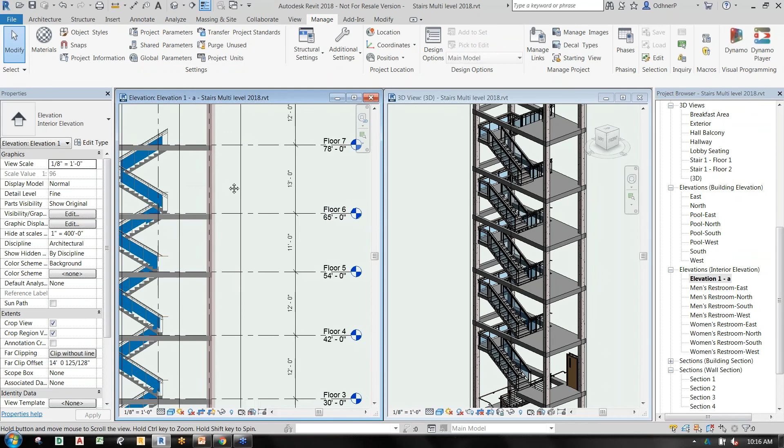Also, you can tab in and cycle through your tabs and change individual stairs within your set here. So even though you're in a multi-stair, you can actually unpin this and go up and edit the stairs individually. A very powerful tool because not everything is going to be designed like a parking garage. This will help you tremendously with connectivity of your datums and your stairs.

So I'm actually going to take some of this. The other thing you can do is add levels - they make it very easy now to add and take away levels from a multi-stair. I'm going to hover over the stairs, and up here in the ribbon you've got this connect and disconnect levels option. So what I can do is hit that, and it brings you into this subcategory menu with connect and disconnect.

So I'm actually going to disconnect the top here, and you see it's giving you the available datums that you can connect or disconnect appropriately. So you could do a crossing here, and basically I can do the check, and then you've got these stairs - just the 3 levels that you need there.

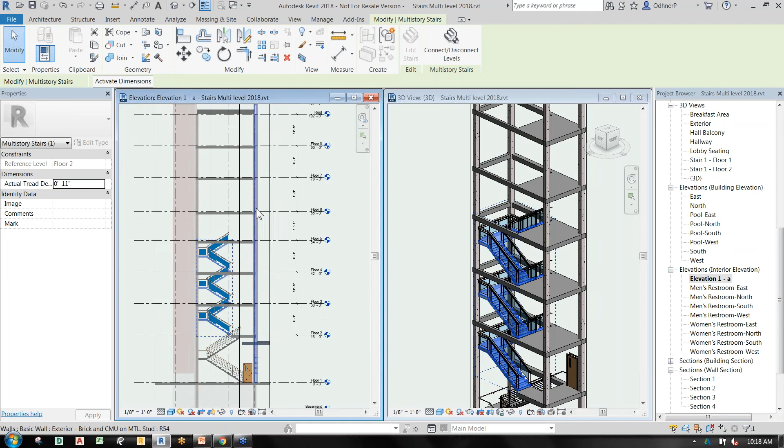The other thing - you can go back, and if I click that again, cycle through there, tab is going to be your friend on this one. I'm going to hit connect and disconnect again, and it's going to open up the possibilities of what I can connect here. I'm going to go through here and do this crossing all the way up, I'll just go up to 6 and 7 again. Check. And you've got that all in one set now. Really, really nice connection there.

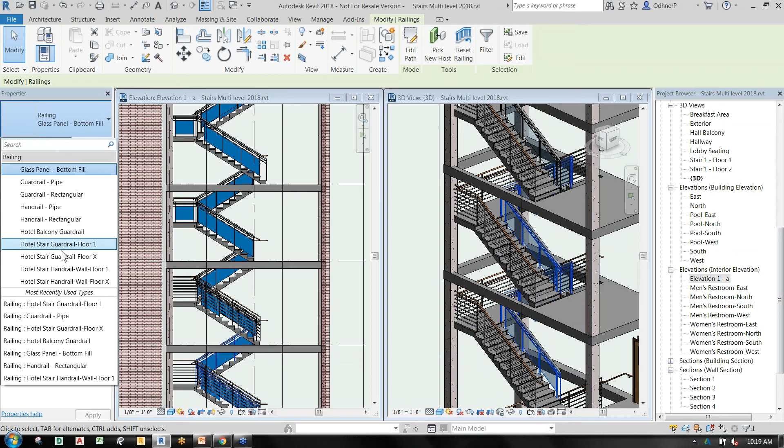The other thing is you can actually grab on railings, and I can do this in a 3D view. Before, I believe you were always able to do this, so I could actually change this in one setting. And if you wanted to go the other side there, you can change that too. So I've got a glass panel, and I'm just going over to the type selector and actually changing my railing type there.

So basically, the levels - if they're moving around, I can actually take this level and bump that up to 55. And these stairs are conforming to the levels. A really, really nice thing.

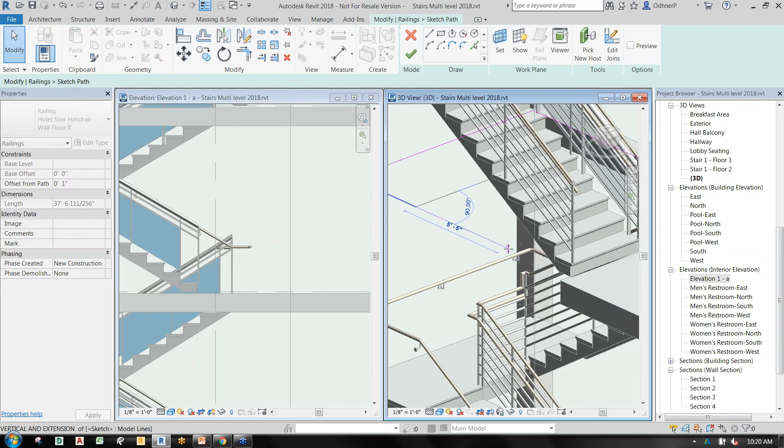Some of these railings right here, you might have to go in there - got a little message there. They've cleaned up the railings a little bit, but you might have to go in and do some touch up to the railings. They've made it now so when you edit path, you can actually see and change the railing for all the stairs there. So I can move that in on a sketch mode, and that section there is taken off, and when I actually hit check, some of that railing should have been taken off there.

So a little more flexibility in railings and stuff like that. We're going to go into railings a bit more now because they actually connect onto surfaces too. Let me bring this back up. Bottom line: you can move your levels around and still have connectivity. Your stairs are grouped by level and height, and level heights can change within a group. Really nice stuff there.

Enhanced railings: you can add railings to the entire multi-story stair tower, which we just did before. The other thing is now you can host railings automatically on contours or surfaces. Before, on version 17, they added a really useful tool where you could add it to retaining walls, not just stairs or treads and stringers. You can bring this onto just about anything now.

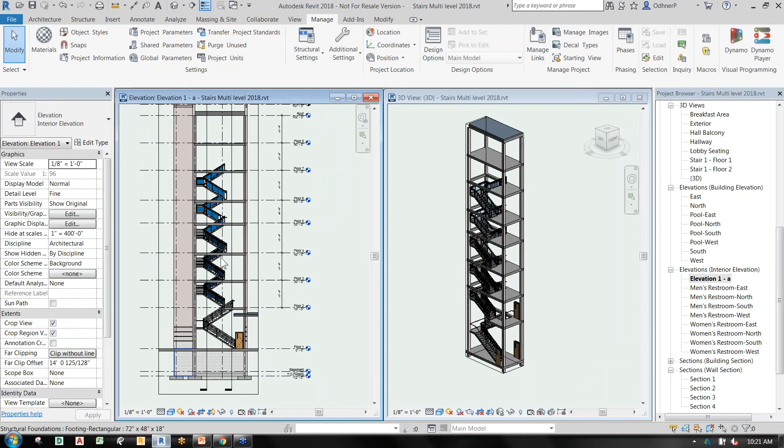So let's give that a shot. We're also going to put this on a topo surface, and I've got one already here. Let me go into 3D. Here we have a very simple contour surface made by Revit. You can see it's not complicated at all.

I suggest taking advantage of edit surfaces and adding topography to your model, because it really brings it out and gives it a lot of pizzazz when you see your building with the surrounding earth around it. I'd recommend, even if you don't keep it in during construction documentation, maybe have it in there during the design intent stage.

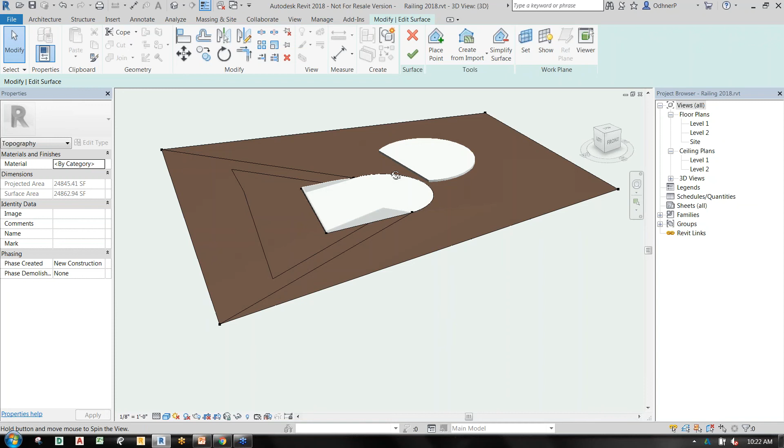So what I'm going to do here is add a stair. We have a platform here, and I'm going to add a stair from the first floor to the second floor. Let me close that up and go into level 1.

There you go. Basically we're going to add a simple stair here with a little landing, going from level 1 to level 2. And we're going to move this so we have a good connection there.

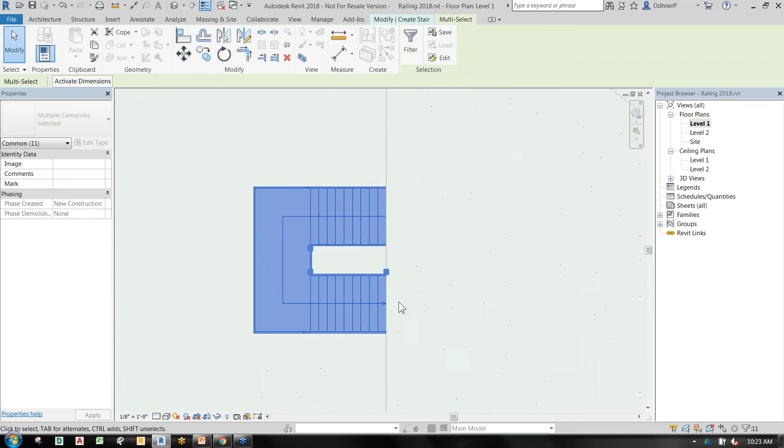Right in here, of course, you've got your railings, and we can add those to the treads or the stringer. So I'm going to go glass panel, add them to the stringer, and connect it. You might get some railing issues, but they've improved those railing connections in the past—around corners and things like that—so you can see you get a little better connectivity there.

The other thing I wanted to show you guys is putting railings on the outside of this retaining wall here. How you do that is you go up to Architecture, Railings, and this time we're going to sketch a path—you've also got Place on Stairs option.

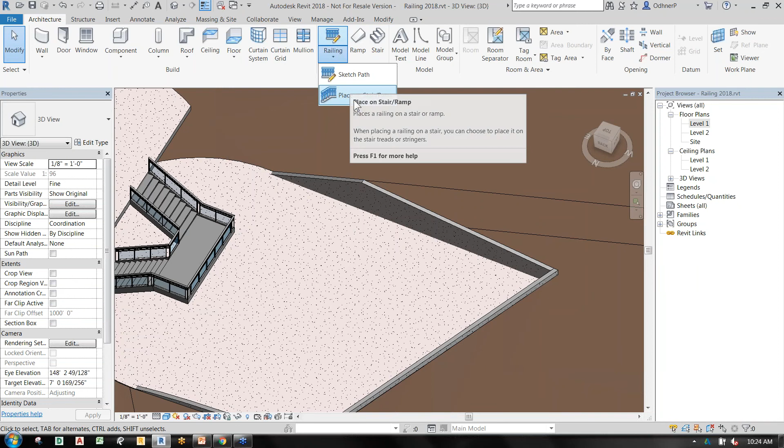So we're going to sketch that path. From here, I'm going to see if I can draw this in. Let me go to my top view, turn this around, and go for the pick lines option.

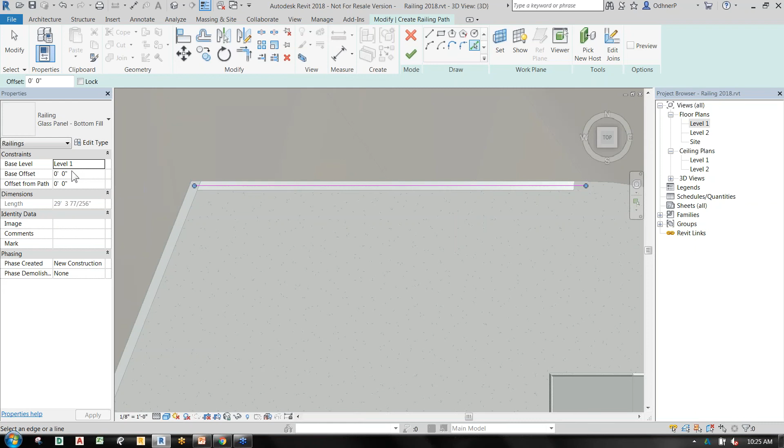Only when you have varying retaining walls, varying lengths and things like that, you only want to do one railing at a time, because you'll have to adjust those railings each time. So I'm going to do the glass panel for that one, click yes, and once we go into an ISO view, we can see our railing is actually going into the retaining wall here.

That's no good unless you actually want that look. But the key thing here is to detach from host, then pick a new host—I'm going to pick that wall—and it actually conforms to that retaining wall. This is actually a spline here, so very nice. Your contractor probably won't like you, but at least you can do some pretty organic stuff on your retaining walls and conform to the code there.

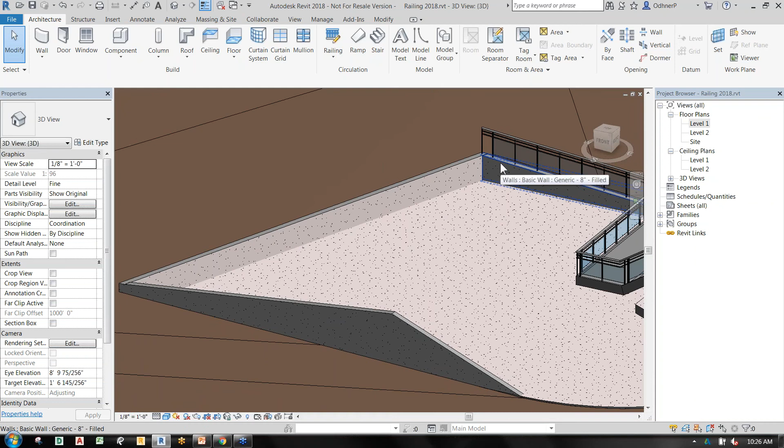So I'll do that one more time over there so you guys can see it. And you can do this in plan view too if you wanted to. I'm going to go to railing, sketch path, and then I can draw this in too.

Let's actually do this. I kind of like when you grab a piece, you can actually zoom right to it there. We're going to take this thing and pick new host. There you go, very nice. That would have been a lot of work actually to do that.

I think the only alternative you would have would be to create some family out of adaptive components to make this thing work. This one is straight across, so I'll spare you on that one.

One last thing I wanted to show you on railings: you can attach railings and host them to just about anything. So what we can do in here is sketch a path.

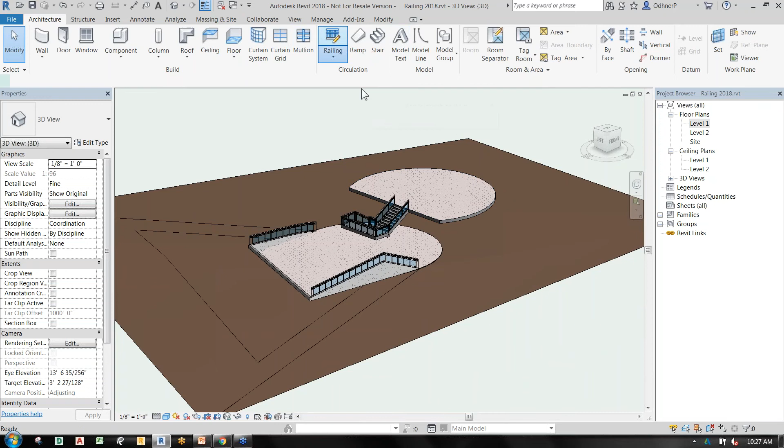I just actually did the surface here, and then all you have to do is pick your new surface, and there you go. You got that nice railing conforming to those contours there. You can use that for all sorts of stuff, like putting in your silt fence around your project, doing staging plans and things like that. So all sorts of uses.

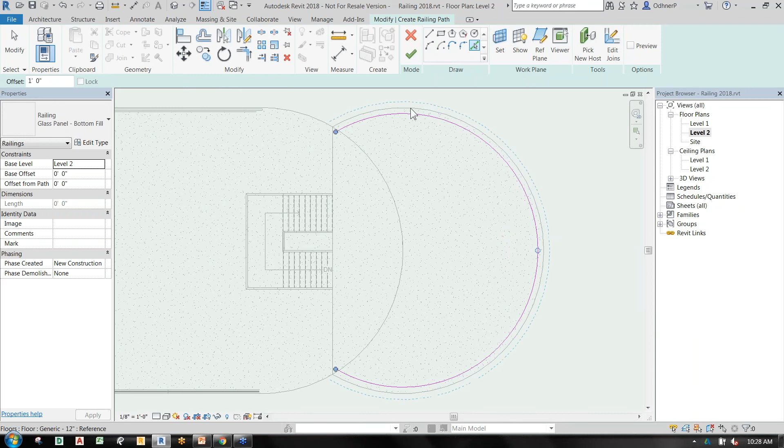One last thing here, I'm going to go into level 2 for this, and sketch it on this platform up here. So right in here, I'm going to go 1 foot on the offset, chain, and pick lines, and I can pick these lines.

I'm going to take this one out. And there you go, you have your nice railing. Let me zoom in here so you guys can actually see this nice railing going all around there. So, going railing happy here.

Really nice, and of course you can go into your type selector and change that railing just in a click. So all those AutoCAD people out there, you'd be green with envy, I'm sure. Very, very powerful.

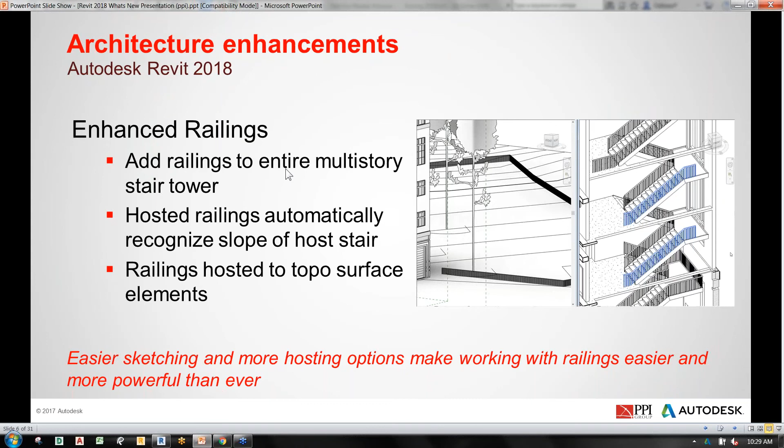So we're going to move on here. Next in line, Revit platform tools. This is actually a very cool thing here. This is multidisciplinary enhancements.

Also, the cool thing is you can start cutting your sections. That's highly important when you're trying to get proportions correct on a design. So you can actually see all your disciplines with your existing site content and things like that. Let's give this a shot and see how it works.

The last thing I wanted to say is the rendering quality here isn't really a rendering, it's only going to be shading. So if you're thinking you'll get a nice high photographic rendering out of this, we're not quite there yet. Hopefully the shaded view will give you enough. And by the way, it's only a coordination model, so it should be okay.

Let's do this. All right, so we are in coordination model. I've tried to load up as many files as I can here to try to save time with load ups and things like that. All right, so here we have a Revit model.

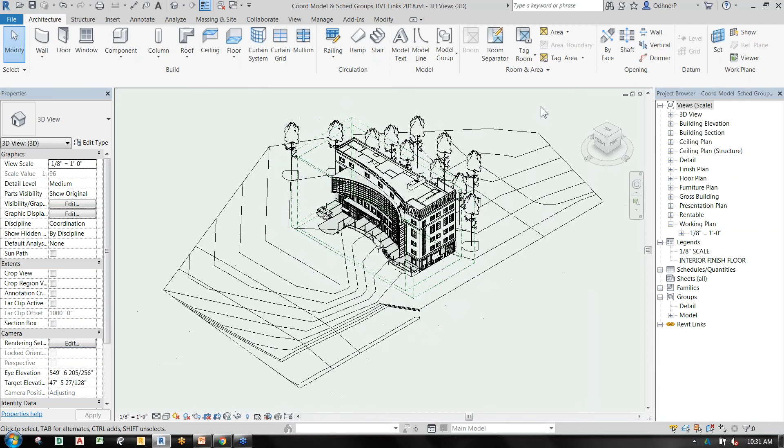We've got some scope boxes, we've got a contour surface here, and we're actually going to bring in a Navisworks file. So how you do this is basically the same thing you normally do: you go insert, and now there is a new button here. That's always exciting to see a new button instead of interfaces just kind of scattered around in different places in the same tool.

So anyway, this is coordination model. We're going to click on that, and we've got two things here we can kind of take a look at. I'm going to bring in both of these guys, the ice stadium, and I'm going to make this relative here.

These are path types, so basically when you're sending this out, I recommend always doing relative paths. That way your partner or colleague can link up when they receive files. The other option here, since shared coordinates is so popular these days, is another coordination feature you can do between Revit and AutoCAD or Revit and Revit. It's very important to keep your files collinear with each other, so everybody is working in the same units and coordinate system.

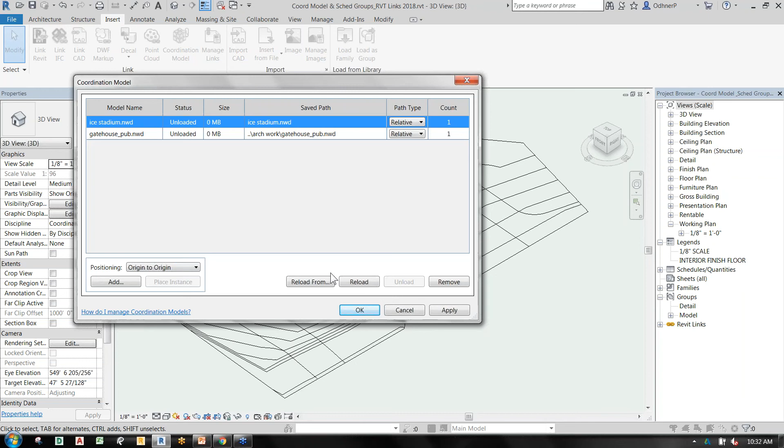So right in here, I'm going to go origin to origin, and we're going to see how this loads up. I'm going to do the ice stadium. Let's see here, let me reload this.

And we have a site plan with this stadium, kind of a funny little view here. Basically we've got our proposed or existing building, and then we may have a Navisworks file that has all our disciplines in here. Now you can actually view this in Revit, in the Revit environment, so you don't have to open up Navisworks and go coordinate that with your BIM manager.

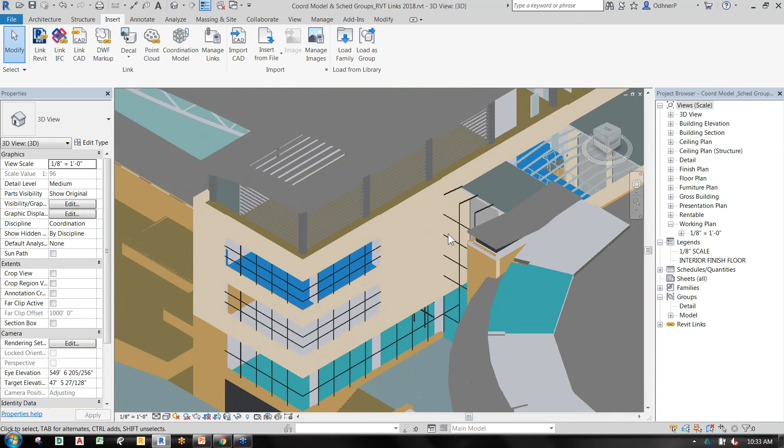So you can just get a sneak peek of how things are going to look, and as a designer it's a very critical thing to have in front of you. So this is incredibly powerful. The other thing is when we cut sections through here, we're going to actually see real live sections. So let's try that out.

I'm going to go to our floor plans here. Let's see here, 3D view, oops, floor plans. And we're going to go to, let's see here, working. Let's go to first floor. I'm going to turn off the crop. Let's see here, let me get my view up.

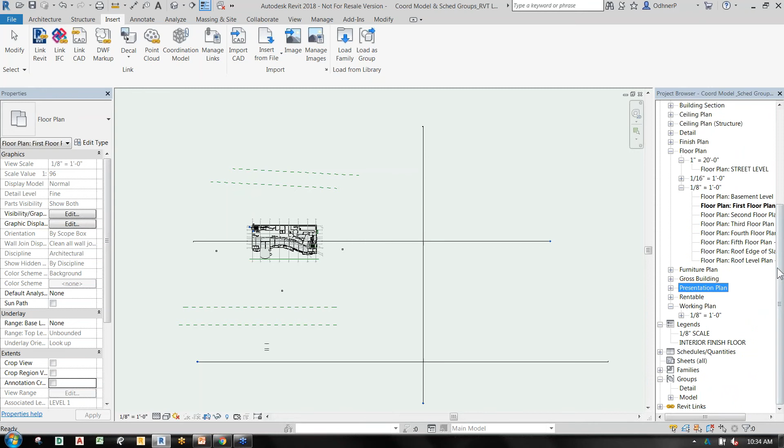One thing about this is you want to also have the same versions too. The other thing is making sure you've got the same versions. So I had a plan in here. I'm not able to find it right now, but basically let me try the second floor coordination.

Well, let me go to a 3D view again. Let me go to the top view. And basically what I wanted to show is a section, but I'm not able to get my floor plan here. Oh well, okay, we're going to just stick with that then.

So let's go down to a 3D view, and unfortunately I'm not able to find that view, but you can cut sections through here and actually see your model come up with the coordination. And you can do that with any file that takes it into Navisworks or anything like that. So I apologize for that.

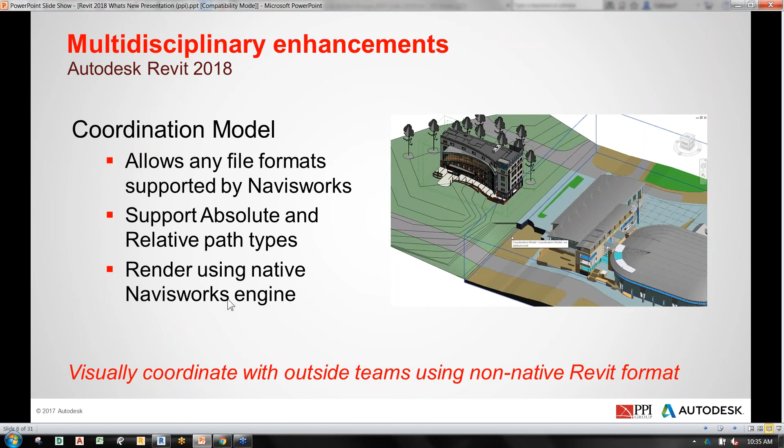But basically this here supports absolute and relative path types, and renders using the native Navisworks engine. So if I go back to this model here, you'll see down here the shaded option. You can actually put it in shaded and see a lot of that stuff in kind of a true view there.

All right, so we're going to move on to the next one here: enhanced global parameters. This is something they've added on to. They already had global parameters, which takes the family parameters you would make during family building and pushes them into the project environment. The next thing they did is allow you to do radial dimensions, giving you a lot more flexibility.

You can also put global parameters within your sketch too, not just outside the sketch. This allows named constraints to be applied to distances and parameters, define critical hold dimensions and flex label dimensions, and label radii and diameter dimensions.

So let's give this a shot, and I'm going to open up... I might go back to this one, see what's happening with that. But in the meantime, let's go back, and we're going to go into global parameters 1. So first off, I just want to show you an example of where you would use global parameters.

Right in here, all these global parameters are functions attached to these labels, these dimensions. So if you do a dimension and you're in elevation, you can certainly make a global parameter up here. We've already got these tested or built. Normally, how you would access these global parameters, since they have a label on them, is you'd go to Manage and Global Parameters, and you could see these. You can type in numbers here and flex that information.

So for instance, if I put in a 10 here—this is kind of where Dynamo really shines, doing this exponentially faster—but right in here we can flex this by giving that a 10, and these windows pop right into shape. So if you have constraints on around features around these windows, you can certainly add these global parameters.

And you know what, let's add a quick one to this window so it actually lines up with these windows here. All you have to do is put in an align dimension.

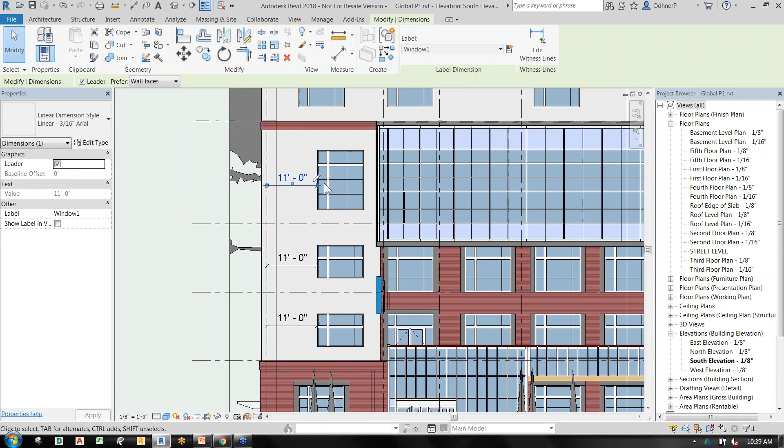Now the new feature in here, aside from the radii implementation, is you've got this little pin, and you can click on that and it goes right to your global parameters. Very useful, quick, and you can start creating new ones in here. This is very similar to family building, so if you're used to that, you'll feel right at home with this stuff.

So let's go into a radii file, P2. Use these prudently because they are very customizable. They're also very, very helpful tools for design intent.

Revit needs a higher level of communication between your team. So it can be a little confusing for people just coming into the Revit world, seeing all these parameters and how they work. Make sure you transfer that knowledge base if you're implementing those parameters on your files, so everybody understands where things are coming from.

So this is the parameter right here, and believe it or not, they did not have radius parameters in global parameters. Now they've actually added that in there.

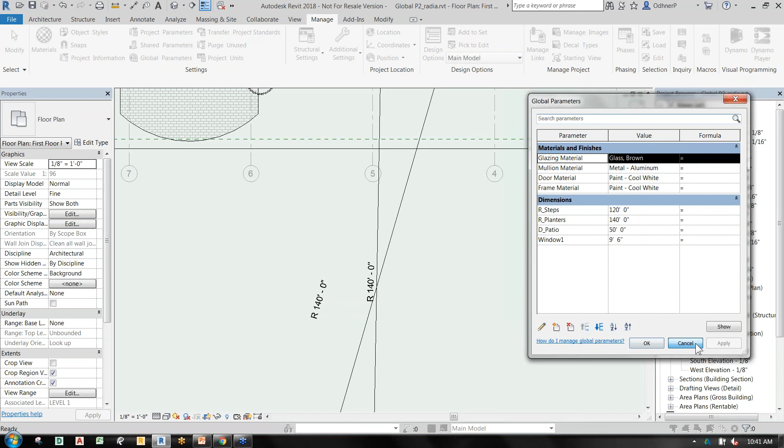I can click on my manage global parameters, and basically I could change this R planters. Let's actually get that in sight so you can see the change, right in this area here. Let me make sure it's on fine and shaded. We're going to change the R planter. This is 140, we can make this 150, and then apply. You're going to see this slightly adjust here.

Also over here, this is R steps. So we can go back to global, R planters—did that one already—and I'm going to just change this to 110. You kind of get the point there. That just changed my steps there.

Now that's outside the sketch. If you want to do a parameter inside your sketch, that's totally doable. You can click on your outside surface there, edit boundary, and you've got this 50 diameter specifying a parameter for this outside.

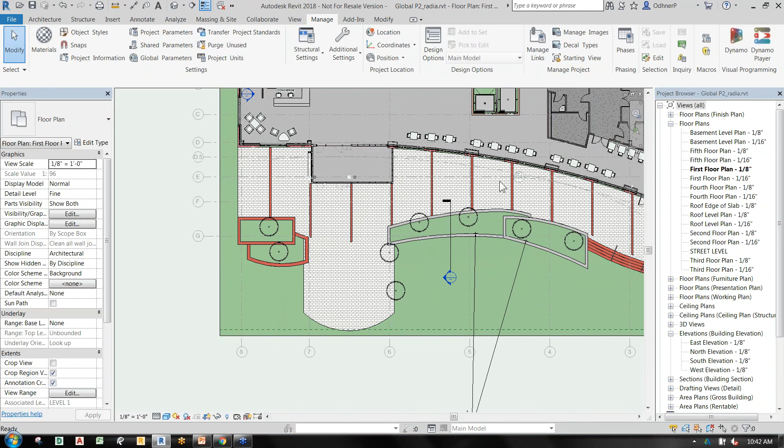So if I go and click check on there, I'm going to go back to my global, and my D patio is referring to this global right there. I'm going to change that to maybe 30 and apply, and you're going to see this thing come in and apply those global parameters.

Very, very good for design intent. You can actually see qualities of your design that maybe you did not see before, so a very helpful thing there. That is global, a little bit about global parameters. If you want to get into family building or any of that stuff, we do have classes here too that we can help you along with, or of course we have support and stuff like that. It's a fun thing to get into, and it can really streamline and supercharge your files.

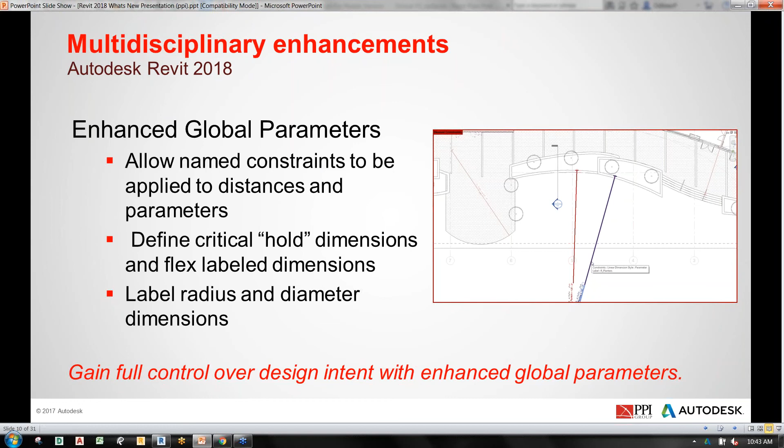So let's move on to georeferencing. We've already had georeferencing in Revit. We can bring in AutoCAD files, we can bring just about anything into Revit that has any type of coordinate system. Basically Revit's not the best at civil coordinate systems and surfaces, things like that, but it does know how to talk back and forth very well.

And this is another feature that is enhanced. So you can now see your longitude and latitude in here, coordinate system inside your Revit model. Let's go and see how this thing performs. We go open here. Georef.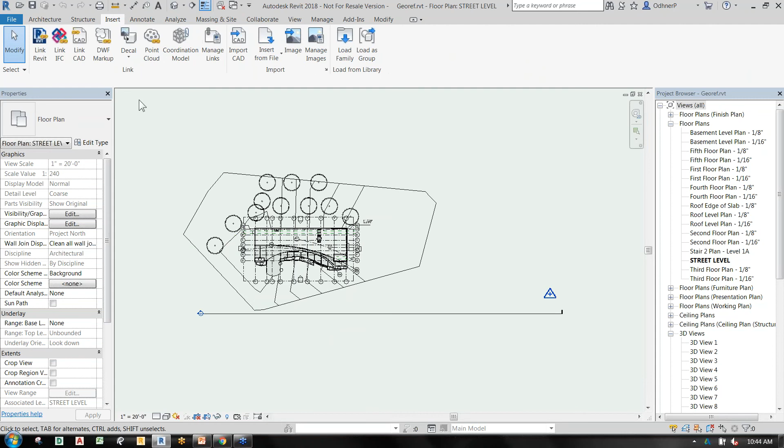I'm going to insert—this is our office building here, and we're kind of just using this as a sample model across the board. So when I actually go insert, I can say link CAD, which we were able to do before, and I'm going to link this site file.

This over here, they're not usually on when you turn on a Revit file, but this is your survey point. That's the key one that's actually going to be connected to your shared coordinates. That will shoot off into the georeference location while you're able to conveniently sit in your Revit world, your Revit coordinates, with the project internal. So when you get any updates to those files, basically that survey point is the key that's going to help you along with that.

If I click on acquire coordinates, because in Revit there are two ways to gain access to those coordinate systems: acquire, which is grabbing it, or push, which is publishing. You can do this, but you have to have it linked or else it's not going to function correctly. So what I'm going to do now is georeference this.

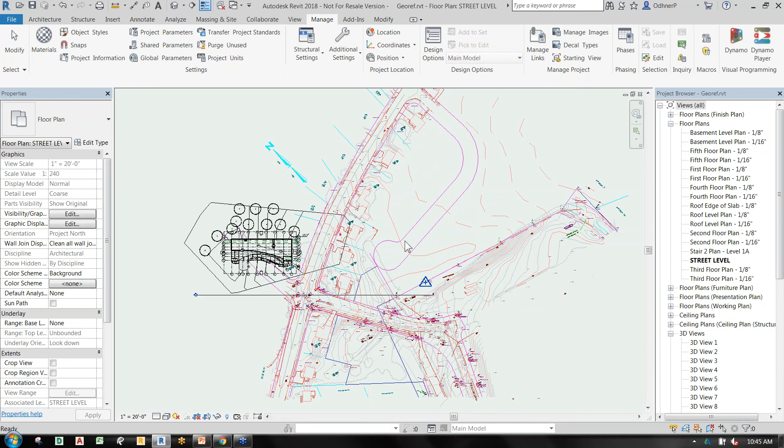I'm going to go up to Manage and Coordinates, and specify a coordinate at point. Actually, one more thing here—let's go to Manage and acquire coordinates first. There you go, now it's actually acquiring.

Now we could go through the whole shared coordinates process, which would take a bit of time—that's not really in the scope of this. But basically this is now georeferenced, and you've got your longitude and latitude here. This is very useful, especially as another level of connectivity, giving you confidence that your file is actually placed in the right area.

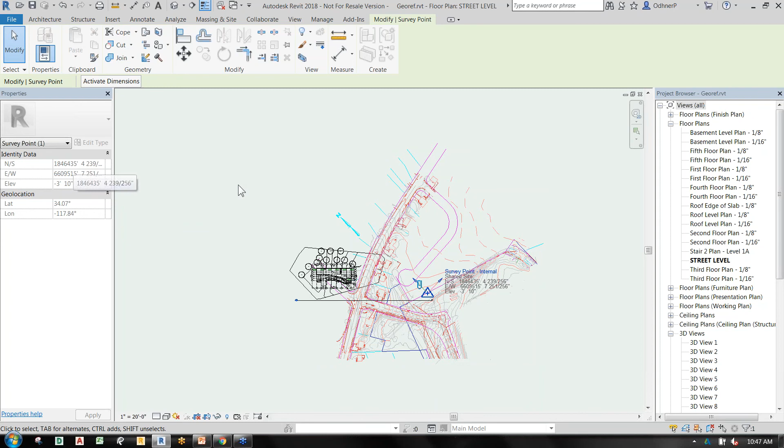So I clicked on the survey point, and you can see this new thing called geolocation, with your latitude and longitude here, plus your coordinates up top going back to the original georeferenced file. It's a very good, universal way to confirm you're in the right coordinate system. So that's the enhancement for georeferencing.

Okay, moving on to 3D shapes now. I think architects will appreciate this a lot. A lot of the time you're going to do the expansive, advanced geometry in Rhino—that's just the way Rhino is made and designed, for elaborate iterations and articulation on surfaces.

So you can bring that in. Before, you could bring in 3DM files and SAT files too, but now you have a higher level of connectivity—you're able to host face-based families on top of surfaces. Let's check this out. You can also dimension to edges and surfaces, very helpful especially with a hybrid design, so you don't have to keep exporting back and forth between Rhino and Revit. You have it right at your fingertips to help your design right away.

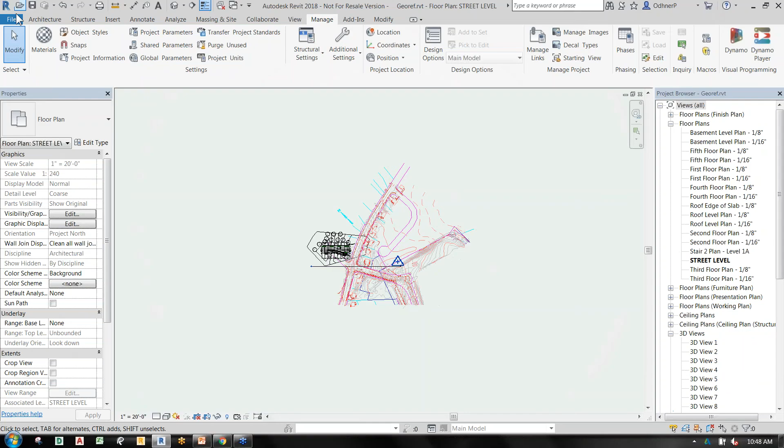So let's go try that out. We're going to open the test file here, called Rhino mass. Now I have loaded this 3DM file in here.

It takes a little time for Revit to load it in, but basically it comes in—it's not degraded or anything. You've got a nice, beautiful perforated, contoured organic surface here. Let's go fine and shaded to get a better idea of what we're looking at—some type of canopy.

Let's cut a section through here and see how this thing performs. So I'm on level 1. You know what I'm going to do? I'm actually going to just add a beam in here real quick.

By the way, for all you structure people out there, this AISC 14.1—it's critical that you start using this to take advantage of all the structural connections and other benefits that come with the newer versions. Try to get in the habit of using the AISC 14.1 shapes here.

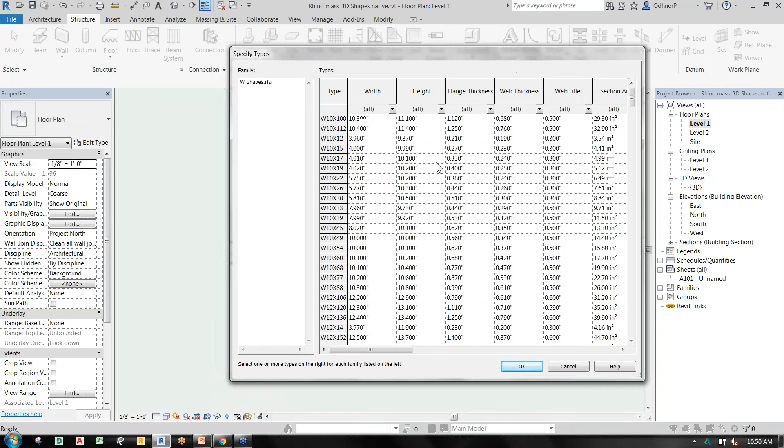And I'm going to add a W shape, and we're going to use this lookup table here. Just a light W10 is fine for this application. Right in here, remember these columns were from the 3DM file.

I actually drew a reference line in here, and I'm going to connect. It says none of the objects are visible due to the depth view, so we're going to bring this Z value up.

What we have here is a 3DM file along with your Revit file. So now let's go in here and cut a section.

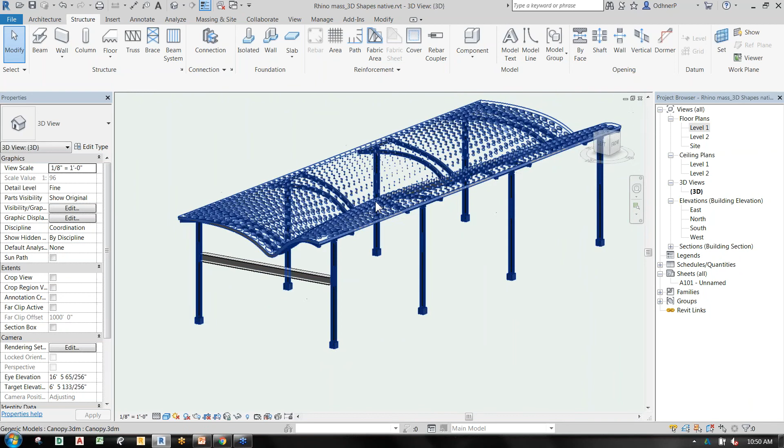Now we can actually go in here and dimension this aligned, and before you were not able to get that snap right here, but now you're actually able to get that in there. Depending on what you're looking for, we can also do a linear, which is more for points. Let's just do a total length there of width of your canopy.

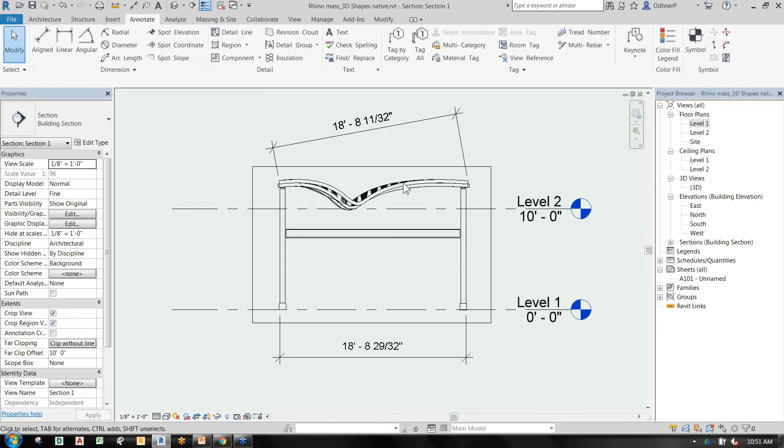It's kind of another huge coordination thing, because you can also alleviate a lot of the problems with bidding too now with your 3DM, with your Rhino file intact, all that special beautiful design that Rhino does. Also with the fundamentals of Revit and the powers of scheduling with Revit, you can really price this thing out and get it built. So it's kind of taking this thing from the virtual world and really putting some real usable information on it so you can actually build it.

All right, so we're going to move along here. The last thing I wanted to mention, I won't go into it, but if you have any face-based families, now you can actually place face-based families on top of your articulated shape there. It's also going into the MEP world too, where you can actually host connectors and things like that. So I'll stay out of the connector zone - that's Curt's specialty.

And then we got multidisciplinary enhancements here. This is a real quick one. I'm actually going to just stay in this file real quick, and I've got a sheet here.

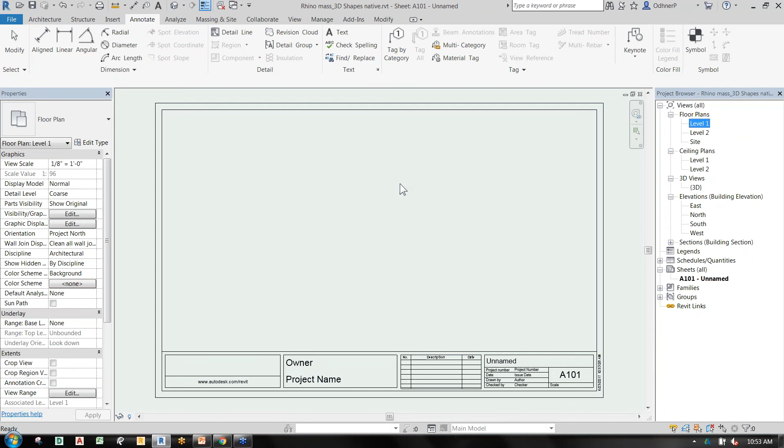Of course, the beauty of Revit is it's kind of the opposite of traditional CAD here - you want to actually be doing your sheets last. Let me actually bring in level 2. Get a better... there we go. So you can see actually they come in the window just like it looks like Revit elements. Really quite striking actually.

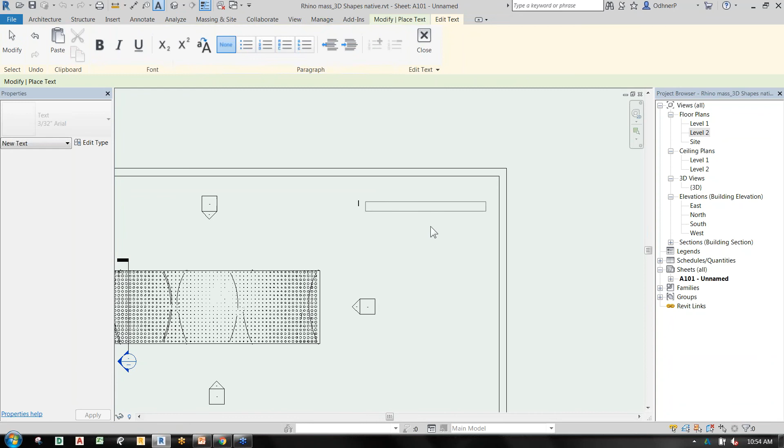Right now I'm going to actually add some notes, and we're going to do some multidisciplinary document upgrades here. So right in here, we can go annotate text. This is kind of cool. I'm going to say notes in here.

And if you right click, you actually get a new one called symbols. You can go in here and you've got Greek, angle, center line. Really, really cool - you don't have to go into your symbols library anymore to get some of this stuff, now it's just right in the font. If it's not working, it's probably because this is font specific, so these fonts have to have specialized symbols applied to each font. So if I right click in here, I can add another symbol.

Phi, and then the other thing we can do is go to symbols, and we can also get a character map now. So I can go to 'other' down here, and we can bring up the character map. This is what I mean by font specific - this is Arial up here, and that is default for Revit. So make sure when you're talking to your BIM manager, to make sure you're bringing in the character map for the right fonts and things like that.

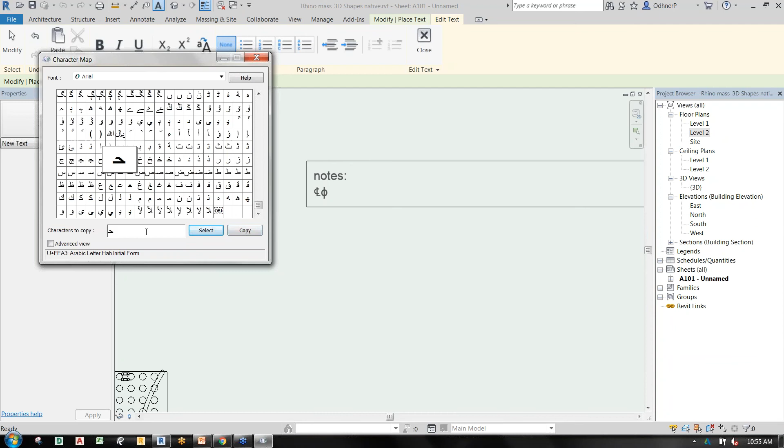So I can actually bring in any one of these now, and let's bring in some. There you go. What you do to bring it in is there's a little select and then a copy here, and then you paste it right in there, and it comes right in.

Really nice feature. Aside from 2017's upgrades to kind of the word processing format and things like that, they're getting better with this text. So hopefully a lot of the time you'll just be linking this from Excel or linking this from an AutoCAD file or existing notes or something like that - hopefully you don't have to retype this.

So we're going to hit close on here, and there you go - you have your final... close again, oops... final notes here. So that's going to be useful for people looking for special characters and things like that in their documentation.

Text rendering of labels is now the same as text notes. So for instance, these guys down here, the phone, the symbolics and pictograms, things like that - I believe it's under wingdings. Actually, just like saying that word, wingdings. So make sure if it's not coming up with these pictograms, make sure that you're in the right font. That's something to just be aware of there.

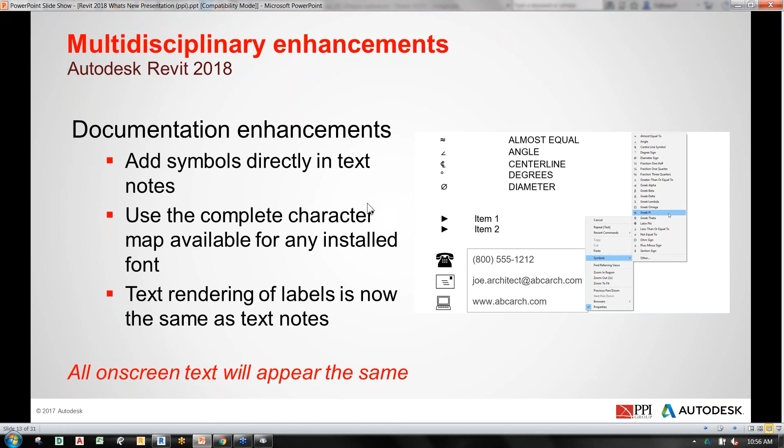And structural design and detailing - we're going to kind of go through this pretty quickly here. This actually makes it easy; Revit makes you look like a pro when they put these in here. They already put in a few connections from this year, 2017. So in 2018, you're going to look forward to a lot more robust connections that are coming in from your advanced steel, and this is by no means replacing advanced steel.

It is actually adding the bidirectional flow that you do need. So if you have any custom families that you're building from these connections, these are all compatible with Advanced Steel. When you're bringing it back into Advanced Steel, you can create your shop drawings right from that Revit content. So there's no waste of information, no redundancy, things like that. And that's where we want to get—one central model.

So two new categories: purlins and cold rolled miscellaneous shapes, or connections that conform to those shapes. And we're also looking at a modeling level of detail at 350. That's actually very exciting. When we get up to that 400, that's almost dealing with shop drawings and things like that. So we're really getting there. It's just going to take another couple years, I think, to get us there.

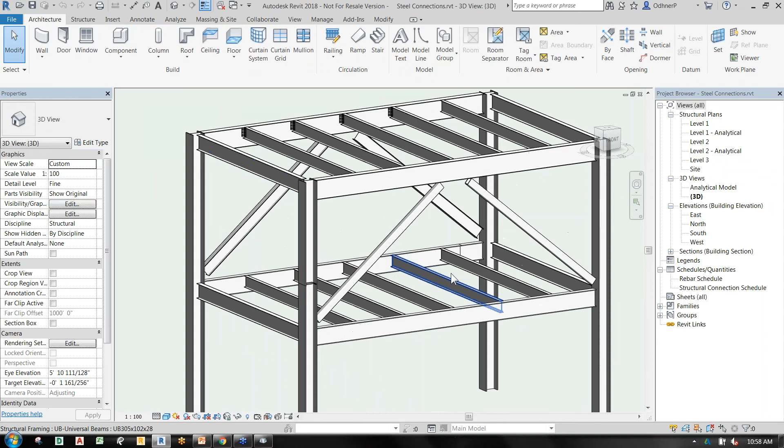This is a clip angle. So when I click on there, it is in your type selector. So down here, I'm going to add another connection over here. I have this girder with the bracing here. Now you can actually do tilted columns for this, or you can do something called X bracing, which is under the bracing.

These special families, connections—they all work with bracing, and they also work with columns. You want to make sure, though, that these connections are conforming to the AISC 14.1 library. That is the key thing, or it will not work. So let's give this a shot here.

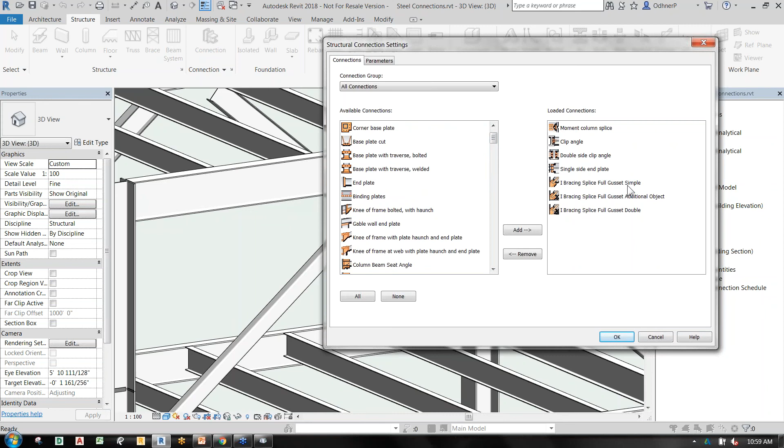We're going to actually go over to connections, and you'll find it right in here under structure. You can click the down arrow there for settings. These are the available connections in Revit here from Advanced Steel, and you can see all these elaborate looking, beautiful connections. I have these over here that I brought over—I-bracing splice, I've got a bracing, so I'm going to try out some of those.

What you do is you click connection—so click your connection, and it's asking you to click on your pieces that are going to be involved here. So I'm going to click on that piece, this piece, and that piece, then right click and finish selection. And what it's going to do here is it may give you some question marks.

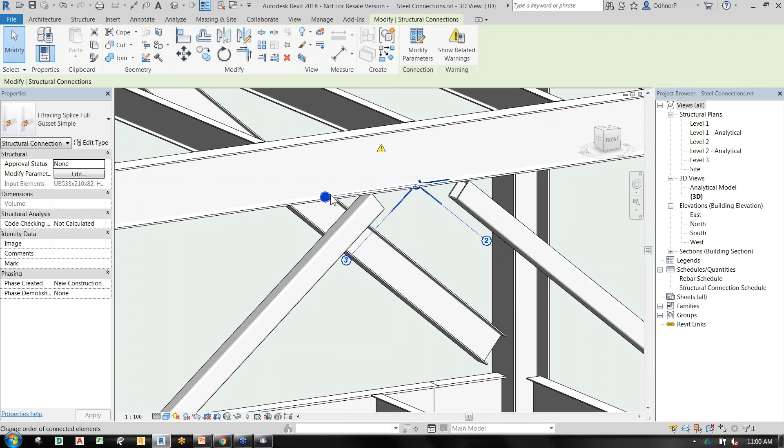This kind of goes into another tool that gives you the versatility of switching the sequence of your connected elements to your connection. I know that's a big one there, but basically if I click on there, I can now move that over to this connection, or I can make this my two connection. I can move my primary over here and stuff like that. So I can grab on here.

Let's make sure this connection—this is generic right now. Let's see if I can—let me try another connection down here. All right, well, we got this one to work.

So this is just one of the features in Revit here that you can use, and these are fully copy—you can copy, mirror, any of this stuff. This is fully adjustable. So if you are a designer type and things like that, you feel very comfortable going in here and changing this information, then you can go in here and say modify parameters, and that's all you have to do. Click on there.

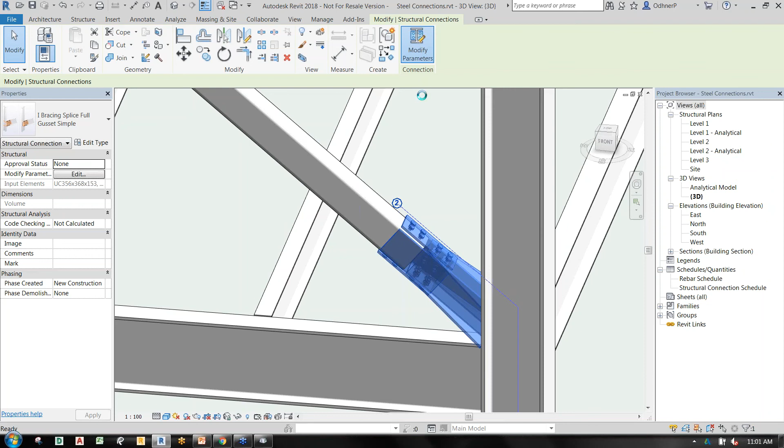This basically could be a class within itself. It's got so much available opportunity in here to get not just a conceptual design, but something that's actually going to have structural integrity by code. So you can go through here and change all these types in here.

Now the other cool thing is don't forget about scheduling, because Revit is so powerful in its scheduling. This is only just one view. What we can do is actually go into view and create a quantity schedule. And we can now see that we have one for connections—structural connections there.

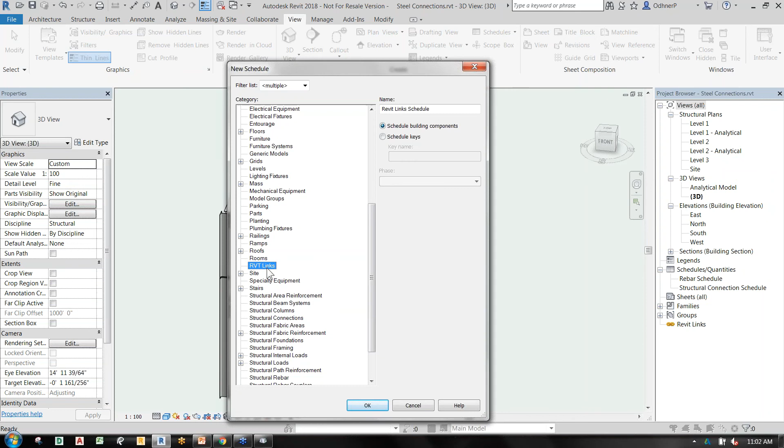Now the other thing I was mentioning is we see Revit links, so now you can keep track of your links in a schedule format—very nice thing to have. And also you've got your model groups right here. So right now I'm just going to go structural connections.

There we go, and bring over some crucial things here. I'm going to say approval status—sure, I'll bring that over. Code checking, definitely. Family and type, yes. Count, sounds good. If you have any cost associated, you can bring in your Excel formulas and bring them right into f of x there. So you can do that. And we're going to hit OK. And there you go—you've got a beautiful schedule.

Let's see here. There we go. I'm trying to move this out of the way.

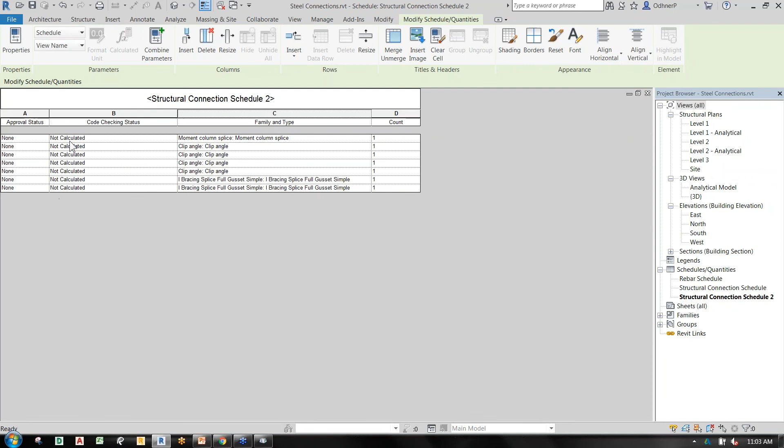See how it says not calculated? This is the code checking status. This is excellent for engineers getting a grasp on what has been calculated and what not. So if you don't use Revit as an engineering tool, you might want to try to go into that a little bit. I know a lot of people in the structural world are using maybe RISA or something like that. If you are using this, it's actually compatible with Robot, and you can bring this right into Robot for your displacements and things like that, and see actually what's calculated.

Now this is a very brief overview for elastic design here, a linear, basically a linear calculation. If you're doing anything more like FEM analysis, you want to actually do that within the structural program, finite element analysis. So this is just a basic static analysis for you.

Structural connections, I'm just going to go through this real quick here. These are mostly just slides. We've got the connectivity. It used to be where you bring into Advanced Steel, and Advanced Steel is very specialized, but I'd say if you guys are working strictly with steel, fabrication or just design or conceptual, this is an excellent tool to have, and if you already have a subscription, it's kind of available for you with little or no cost.

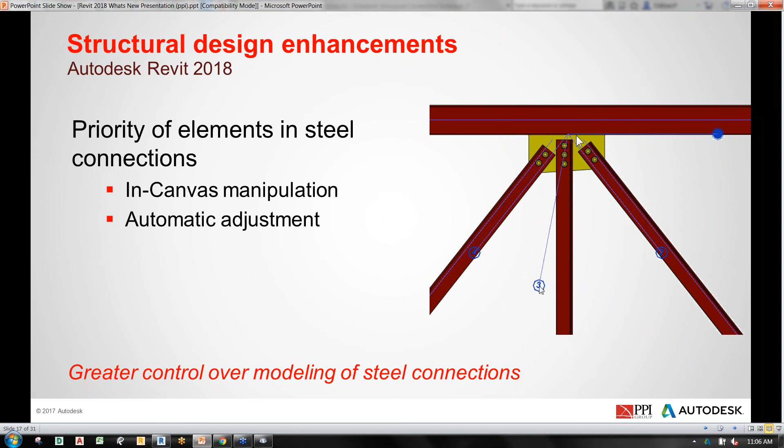So structural design enhancements, this is actually the priority thing, which I was having some trouble with. But when you get the right connection, I think it was user error on that one, but if you get the right connection, like this is a gusset plate with angles, and if you find that little error mark, you can move and switch around these points, alpha points, and Revit will start understanding where you actually want this primary connection to be. So you can play around with that.

Enhanced interoperability between Revit and Advanced Steel. That's what we were mentioning before with 130 parametric steel connections.

We've also got variable rebar placement. This was a 2017 feature. Basically you have your adaptive component, you have your rebar, and you move your adaptive component, and your rebar actually follows to all your structural cover settings for your rebar. Excellent. So I would actually, if you're doing high rises, maybe do one floor of modeled reinforcement. And also if you're doing post-tension, you can also use reinforcement for post-tension and do your strands, things like that. I know there's not a post-tension tool, but in Revit, the more creative you are, the more I think you're going to get out of it in the long run.

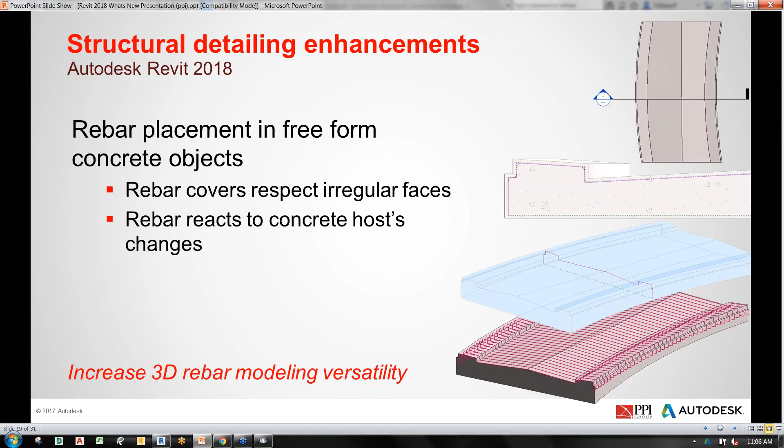So the last thing we have here is structural detailing. This has a lot to do with these special design shapes that you're going to see. And again, this is conforming—the reinforcement is conforming around there. Autodesk is making it as easy as possible for you guys to actually put in your reinforcement and model it.

For instance, if you have a crane on site that's coming in and you're doing a foundation for the crane, I would model that in Revit right away and send that right to the rebar fabricator, and you can do all your clearances and everything within Revit and avoid those problems in the field, or at least most of them. This adds on to your structural rebar versatility.

Sure, I'm going to go ahead and give Curt access. A couple of questions came in toward the end of the architecture presentation. Tracy asks, can you snap to linked Revit models? Yeah, you can snap. If you have RVT links into your Revit model, you can absolutely snap to them. I think you were able to actually snap to them in previous versions.

The biggest advantage of this version is now you can actually bring in your Rhino 3DM files natively into Revit and actually start snapping and continuing your design with the Rhino information. Yeah, and SketchUp too.

She also asked, can you assign parameters to linked models? Yes, absolutely, and that was a great question that just came in during the structure presentation. Yes, you can. You can bring in and actually add parameters to your content that you're bringing in, 3DM and SketchUp and things like that.

And if you're doing a lot of conceptual work, I would suggest using FormIt. FormIt is a great thing, it's web-based, and everything you do in FormIt is totally compatible with SketchUp and Revit. You bring that in and everything comes in as families into your Revit model. So FormIt is a great way to preserve and capture your conceptual design and carry it through your building life cycle.

She was a little surprised to hear you referencing Rhino. Do you still see a lot of people using Rhino? Yeah, from when I was in the industry a couple of years ago, and also through classes, I'm actually a little surprised about this too, but Rhino seems to be the choice for people. I think it's because they have all their legacy data in Rhino, and Rhino has been around for a while. They're still supporting and doing a lot of stuff for Rhino.

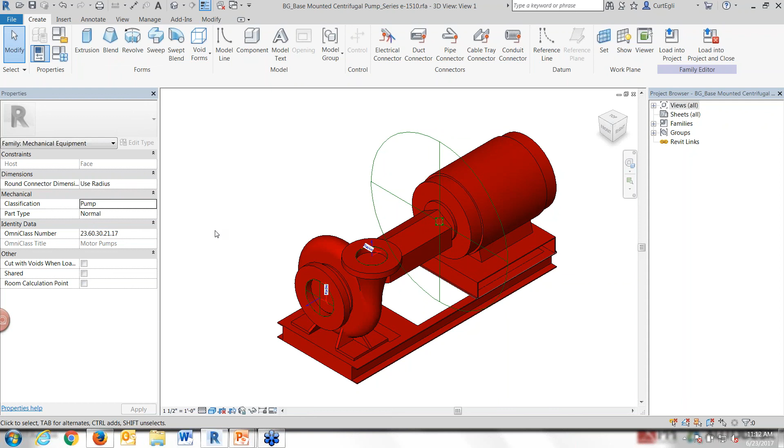So this pump right here, if I open that up in the family editor and take a look at it, we're going to enable this. Here's how you go about it. For the classification right now, it's normally set to none, or this is a new parameter, so I'll set that to pump and tell it that it is a pump. Then on the two connectors here, I'm going to assign the flow configuration to be calculated, and then my loss method as well. I'll do that to the second connector here with the calculated setting and the loss method for that.

And then I'll turn around and send that back into Revit. So I'm going to load that back into my project and overwrite the one that was in there. It'll crank for just a little bit with the spinning donut here, takes about maybe 10 seconds while it does that. I'm going to select the pump and then just quickly look down on the lower left-hand corner of my property palette, because you'll see it start to calculate when I do that.

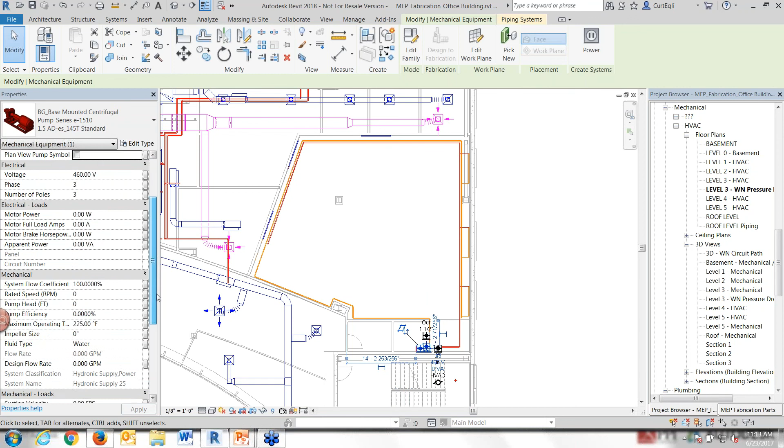After I've enabled the analysis on that, let me get to this, so we're going to head over there. Maybe I'll do this in the 3D view so you can work with it there. This view right here, okay, working with this. So I'm going to go and tell it that I would like to do calculations on hydronic networks. I will enable the analysis for the closed loop hydronic piping network, and I say OK to that. And then if I say OK, here's where I need to look fast once I get this selected. It's processing it.

And here we go. Okay, I was too late, that was too fast. Anyway, for a little time it will show calculated flow and pressure drop in these two areas. Okay, so I was too late to the party. There you got the answer, right?

I guess that's good that Revit's that fast. So now let's take note of this: calculated flow, take a note; calculated pressure drop right here, take a note.

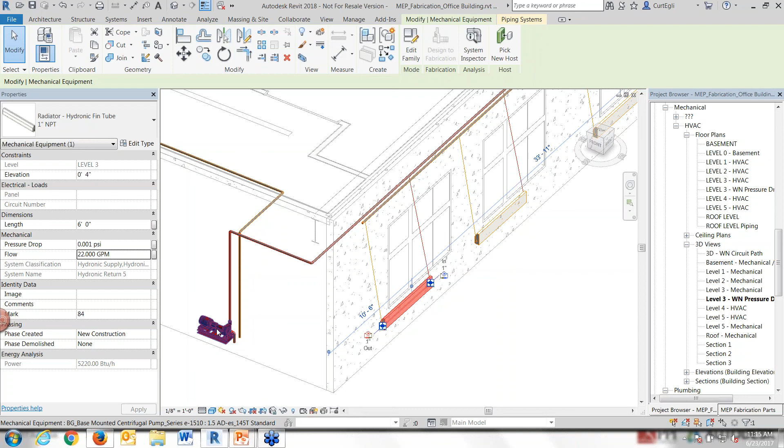So with this radiator over here, I'm going to change the flow on it. It's set for 10, I pump it up to 22. Now if you look back here at the pump, you can see that the calculated flow has changed already, and calculated pressure drop has changed.

So let me try the next one over here and pump that one up as well. And go back to the pump. Already the calculated flow and pressure drop have changed.

So what we're seeing here are improvements in the scalability of Revit to push the flow and pressure computation at the equipment, so that you can do that closed loop hydronic analysis, all of this while you're modeling, right? So we don't have to wait for that.

So I'll drop back over to Revit so you can see what we're talking about. Here's an example of it right here. We haven't quite got to the point during design development where we're sure we want to place the equipment; we haven't made a commitment to it yet. And now we have an analytical connection that we can make from this radiator, for example, and then back to the pipe like that.

So what that'll allow us to do, with the analytical connections, is get a relationship between the pipe and the equipment. So when you're working with main distribution sizing, for example, and you want to get the preliminary flow and model-based head requirements for your pumps, this will help you do that with easy iterations. And you can move your equipment around without having to remodel, and yet you will retain your pipe connectivity for your early analysis, right?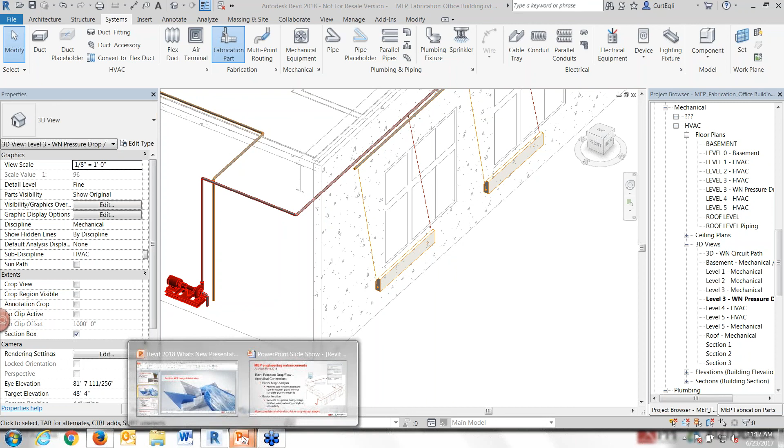So this enables early analysis so that you can make informed decisions before you invest too much time in tedious connectivity with pipe connections. The next one I wanted to highlight was outside air on spaces and building types.

In the past with Revit, the whole list has been hard-coded, both for building types and for space types. And now I can make my own new ones. And then you'll also see that there are 4 new parameters that have been associated with those as well, or in the hard-coded ones too.

So let me go show you that once in Revit. So meanwhile, back in Revit, I'll just leave this view open and go to, let's see, that'd be under here, the mechanical MEP settings. And building and space type settings here, let's go to that.

So the new parameters that you're seeing under building type here: outdoor air and outdoor air changes per hour, and then the outdoor method we're using right here. Secondly, under space type as well, we have 4 new parameters for outdoor air across here, and outdoor air method right here as well, for people.

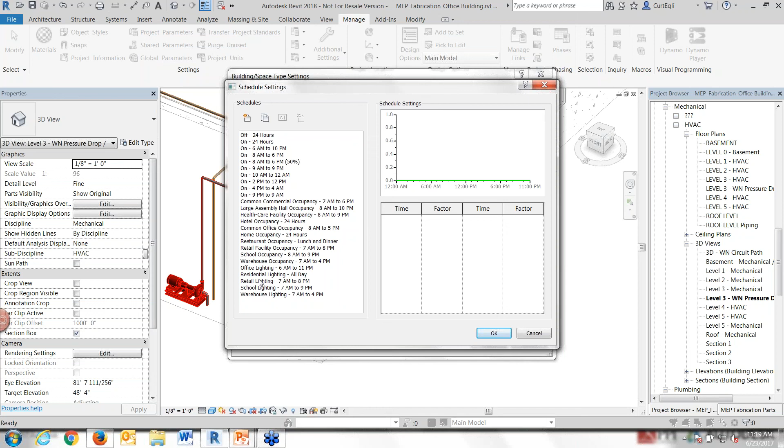I'll take retail lighting for that, and the power schedule, as I'm fleshing this out, take that. And then CFM, I'll say 10 CFM for that, and per area 0.12 for that. So I can flesh that out myself and fill those out.

Now, we've never been able to do that before. So let's take a look at space type as well.

Say that I want to have a new space type in here. Instead of the hard-coded list to the left, I want one called gymnasium, and say OK. And the same thing there—I can come in and set the residential lighting or retail lighting, that sort of thing on it, as well as including air per person on that.

So what you're seeing here with Revit in this vein is an introduction where they've introduced ventilation rates into the building and space types to help support that kind of workflow you might be up against in the mechanical realm. When you populate those ventilation rates in your spaces, the information will make its way from Revit into Insight 360 for the analysis part of it.

Let me go on to another one here with electrical circuit pathway. So something new that they've included that I wanted to highlight in the electrical realm is to be able to do an analysis of voltage drop.

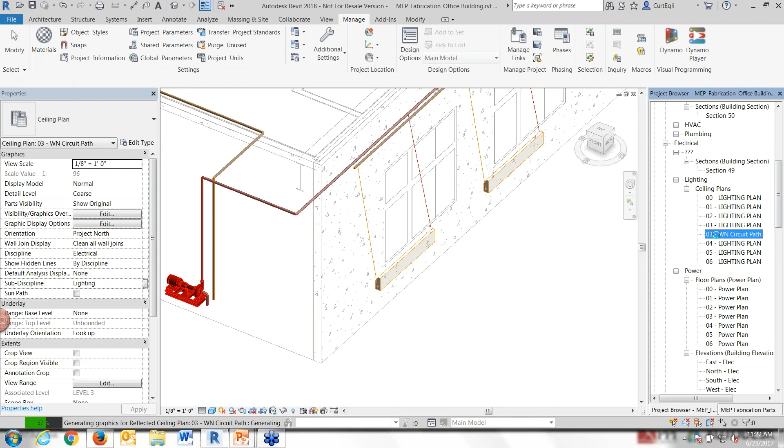Let me go to that view. Let's be up this way, electrical lighting. 3rd floor, let's go to 3rd floor for this one. Okay, so I'll zoom in just a little closer so you can see this.

This light over here, for example, I'm going to tab to its circuit and select it. Now, the electrical room is in the basement or 1st floor, clear underneath this area over here. What kind of length is there between that? Well, let me hit Edit Path.

It's a new button in Revit, and it puts me into one of these modes—green check mark, red X—but now I can see the path that it's initially choosing. I've never been able to see that path before, let alone change that.

If I select on the path, you can see up here in the ribbon at the top that it's 200 foot 10 and change. And the voltage drop right now, I'll point it out with my sonar here—the voltage drop is 0.41.

So let me edit that a bit. I'm going to take this and put in a new control point in here, and then drag that control point up. I've got to go around the mechanical chase right here. So in reality, when they're out in the field, this circuit pathway is actually going to be longer than what initially I was seeing out of the box there.

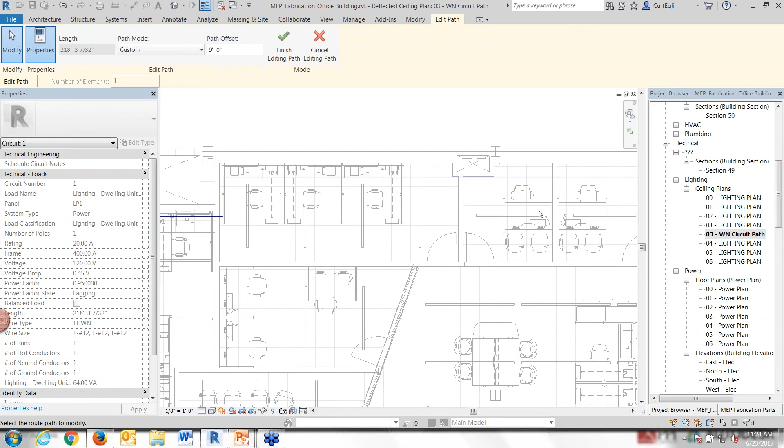I'll just do one last drag here, and then I'll move on. Drag that out like this, and now that one's heading around, and the numbers have increased, and the voltage drop has increased as well. And what we're doing here is giving you unhampered calculations, I guess is what I'm trying to say, when you're trying to get the computation done.

I'll move on to slope pipe next. I had two more things I wanted to show you, so let me go through those. Here's slope pipe for fabrication elements that I think I'd like to do next.

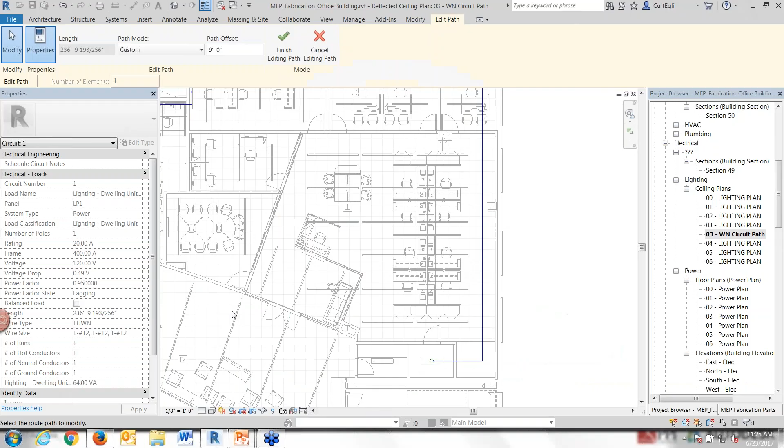One of the problems we've had is things not wanting to stay in place when you start changing the slope, both vertically and horizontally. I'll show you a little bit of that with part-by-part modeling. For the next two steps, I wanted to point out that I have installed Autodesk Fabrication CAD MEP so that I could get at the services here for fabrication parts.

So that's what you're seeing off to the side. You've seen this in regular Revit, that there's a fabrication part in there, but you probably weren't able to use it without that aspect. That can be used on the CAD side, on the AutoCAD side, but they're going leaps and bounds in getting Revit enabled with this as well.

So with that, let me choose a view that makes sense here. Let me go to plumbing piping and go to level 4 for this one. And here I'll work over in this area where the showers are. Okay, so with that, I'll head back to my fabrication parts, and I'm going to work on the plumbing waste lines here.

I will do no-hub pipe here and apply a slope as I work. So I'm going to say slope up, and I'll use this slope right here.

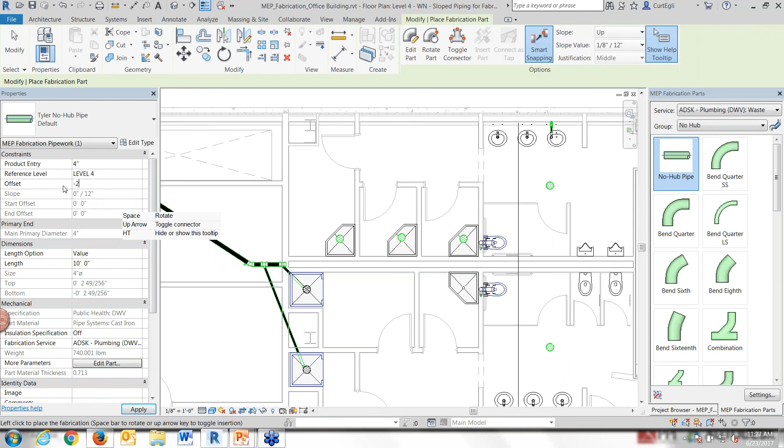I think I'll start with a product entry of 4 inches and go underneath the floor here with 2' underneath the floor. I'll place in my first length of pipe here, and then another length of pipe onto the end, and you can see that they're putting in the fittings as we go.

From there, I'll go ahead over to place a combination here and insert that part right down here, and another one right here. Spin that over, and then maybe another one, a combination double in this area right here. Insert that one in line too.

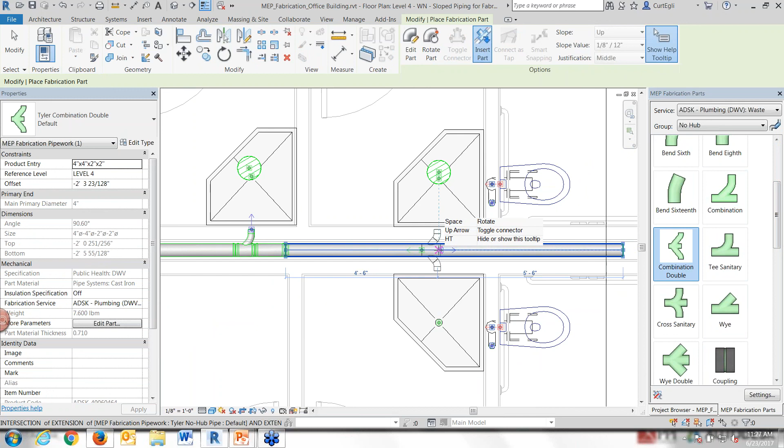Okay, I got those dropped into place. Let's put just a little bit more pipe on these. I'll put in a 1-footer in here on the ends of these. Now you get a little bit of a sense for how the fabrication tools work at the same time here as I'm working, dropping in pipe.

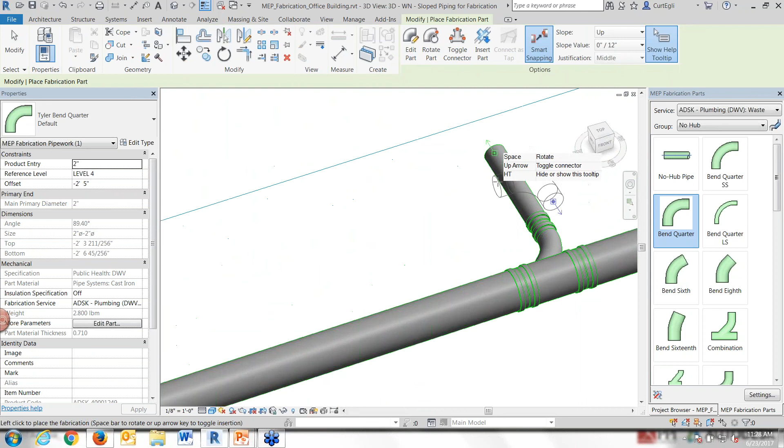Let me head over to a different view so you can see this in 3D. Here's what I've been modeling in this area right here. Let me put in another fabrication part on this one, a quarter bend. Put that right here. And another one right here, so you can see that.

Probably want them to point up. That would probably be a good idea, Curt. There we go. And then drop in another length of pipe on there like that, and it reorients itself to be vertical the way that we want it.

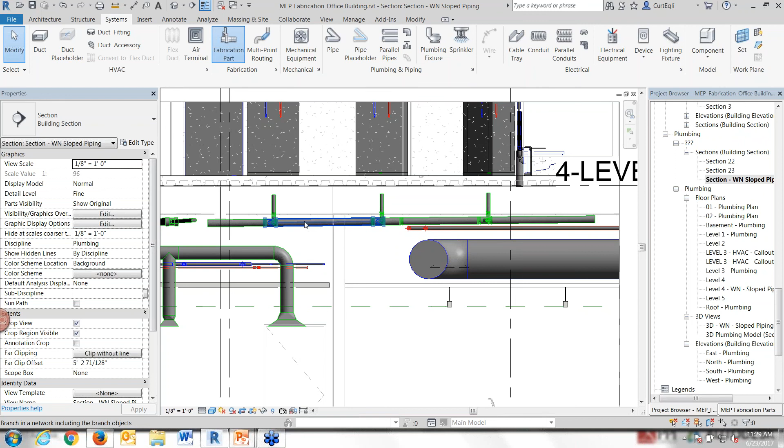Now with that, I have been working on the pipe here that is right in line with those showers. But if I head over to a different view here and take a look at it from the side, ultimately what happens is, because we're trying to work our way around structure and the like, we end up having to mess with the slope. The problem in the past has been that adjusting all of these ends up messing up the work we've tried so hard on.

So I'm going to select it and change the slope on that, taking a new value and finishing. And now it's 1/4 inch to the foot, and they all are locked in place and stay vertical and adjust to line up with the plumbing fixtures. One last one here before I move on and finish, just to prove a point.

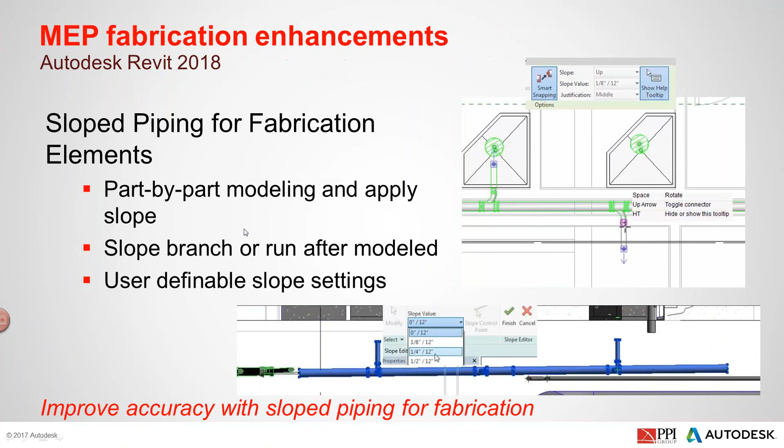Too cool. Okay, great. Let's go back to one more slide I wanted to show you here of routing, multi-point routing for fabrication elements.

I wanted to do this a little bit with duct, but I could do this with pipe, I could do this with conduit or other things like cable tray, where you can tap in and tee off of fabrication elements while routing. You'll see the point-to-point modeling that we're able to do now with fabrication.

So is it okay that I do maybe one more here? Yeah, let's do one more and then we'll wrap up.

Okay, all right. Let me go over to another view for HVAC here. Let me go to the mechanical area for that one. And let's go to level 5 for that. Level 5.

Okay, down in this area right here, I'll turn off thin lines once you can see this a little more readily. So with that, I'm going to shift myself over once again with the fabrication selections here to use supply air.

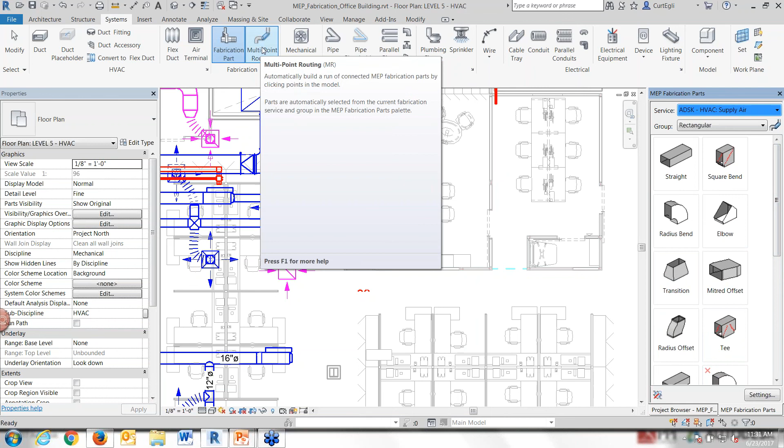I can exclude which kind of fittings I don't want it to use to better get my design intent going here. And now here's the multi-point routing that I was talking about. I'll shift that in place, and I'm not going to fill in any values because it's going to inherit it for me, and you can see it jumped it up to 13 feet.

I think I'm going to come off of this at 24 by 20. I'll change the size of it, and come out here, come down here, come out here, stay over to here. So it's putting in the bends as I work.

Now in the middle of working here, I'm going to bring up the autofill and exclusions and say I don't want the radius bend anymore. So I'm going to exclude that as it works. You see what it did at the last 90 degree that I did.

And now if I come up this direction, say here, and you look back behind, you can see it's used—I didn't have the radius bend as a choice anymore. Maybe I'll make another segment here so you get more of a sense of how it works, like drop that down to a 20 by 18, for example, and come up a bit farther and then come over. Do you see how that's working?

The other thing I wanted to show you, if I come back to routing here, I'm going to use a tube for the next segment over here, and I'll exclude the 45 and the 90 bend on this to tap in or tee off of different elements here. So for example, if I do that from here to here, I get this kind of a solution that comes out.

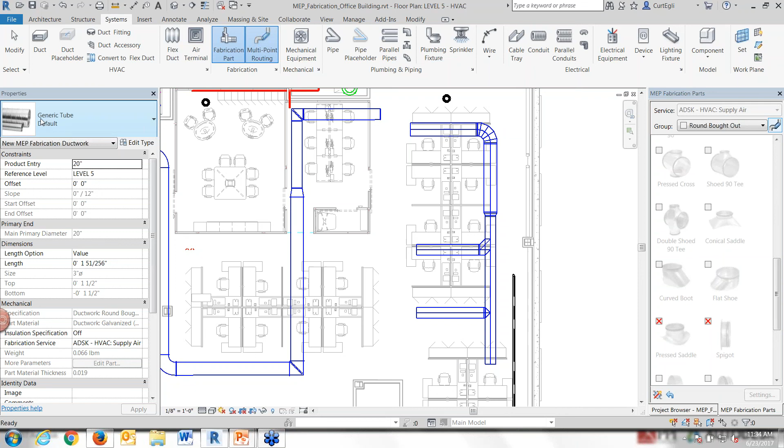So once again, what you're seeing here will work not only for ducts, the fabrication ducts like we're seeing here, but also pipes and electrical containment components, to help improve your productivity.

We've been going over some of the new improvements in Revit 2018, Patrick and I. Under this new model, the way Autodesk works, they don't have to wait around for a new product to come out. If they have something built and you're under subscription, they can just feed it to you as you go. I just wanted to highlight that Revit 2017 came out about a year ago, and then somewhere along the line Revit 2017.1 came out, and then Revit 2017.2 came out, because they could start to build in the new improvements as they're ready for prime time.